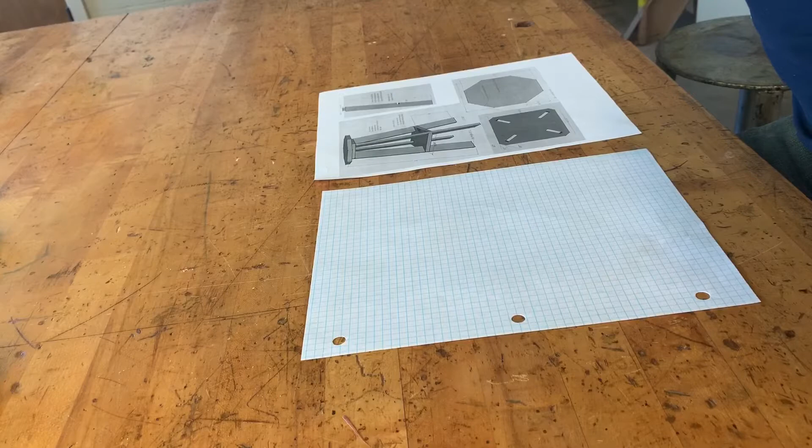So now what we're going to create is a little cut list off of that board that we just looked at. What I'm looking for on this paper is basically the overall perimeter that thing's going to take up. I'm not worried about the angles, I'm not worried about all the little detail stuff. I'm just trying to get a general idea of where all these pieces are going to come from.

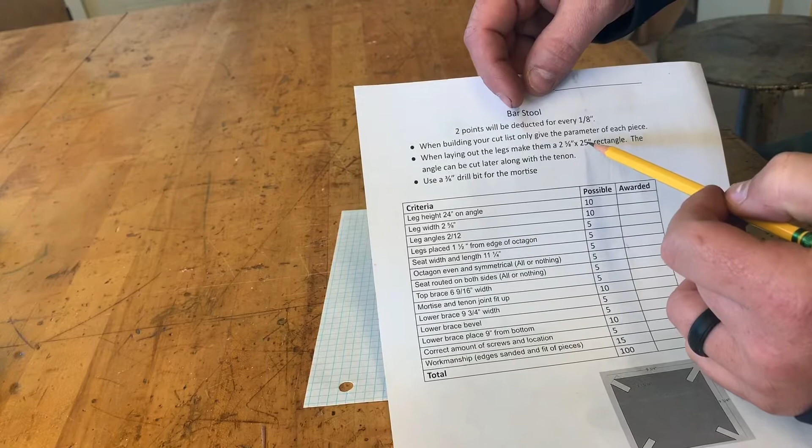One of the things that we're really going to look for is that on the legs, it tells us here that we want to cut them 2 5/8 and then 25 inches. So kind of a little key that we have in with these things. So we're just going to lay out and do a little cut list of everything. Every box on this thing is going to represent 1 inch. I can't do the full length. I would need 60 boxes, and I only have, I think, 52 on here. So we're going to make every box represent 2 inches.

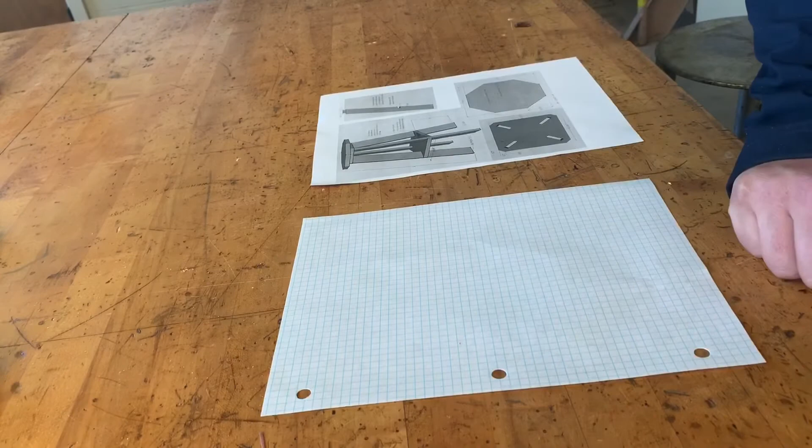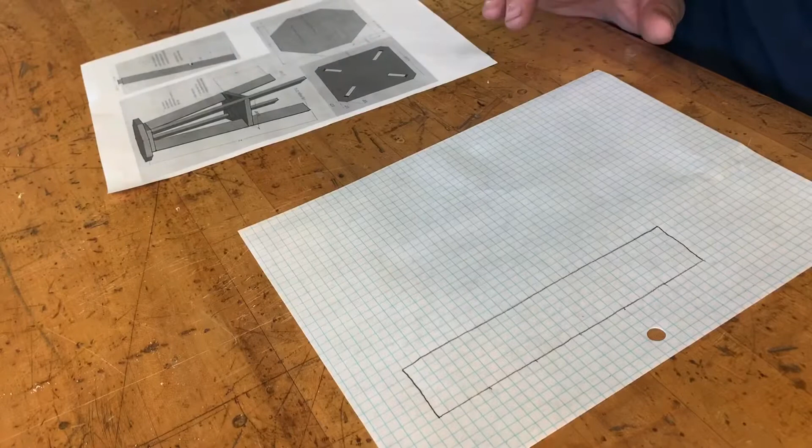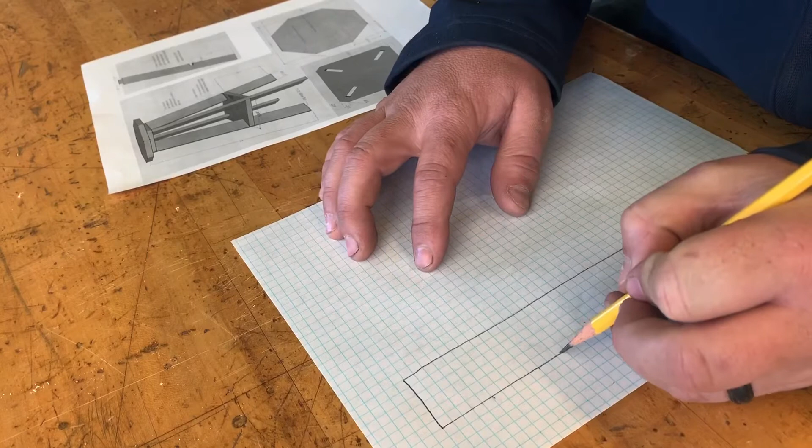When laying these out, you should always take your biggest pieces first. In this case, it's going to be our legs. They are going to be 25 inches long, which means on these, we're going to have to go down 12.5 boxes. Once you get the 12.5, you have to get the width of it. On this, it's going to be about 1.5 boxes for each leg.

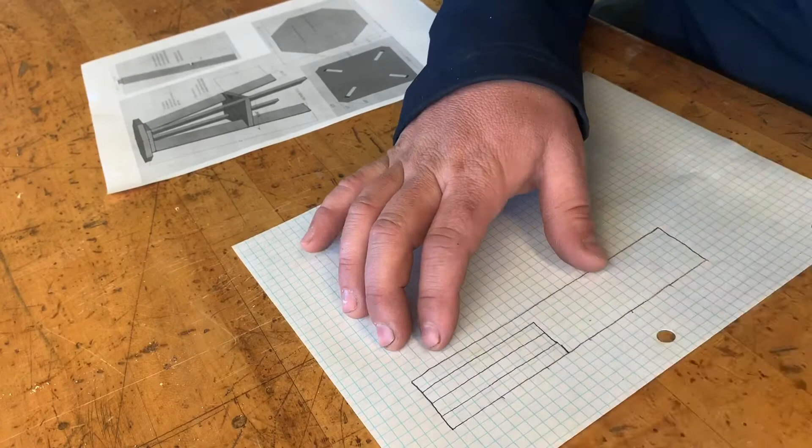Do that. We're going to see how many legs we can get out. If I'm 2.5 here, I need to go right here. We can get another set. All 4 legs out of here. Leg 2, leg 3, leg 4.

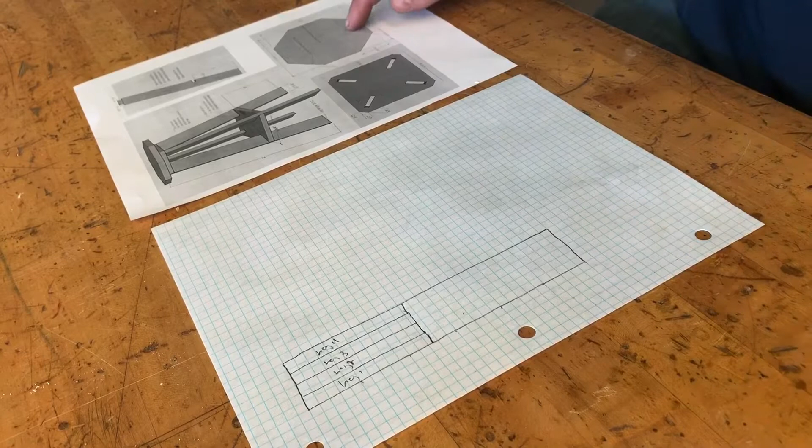Probably the next biggest piece that we have is going to be this top piece. That's going to be 11.25. For all intents and purposes, we're just going to say that it's 12 inches. So we'll calculate these things. It's going to be a 12 by 12, always rounding up. We're going to go 2, 4, 6, 8, 10, 12. So we're just going to draw this line across. That's going to be our little top piece right there.

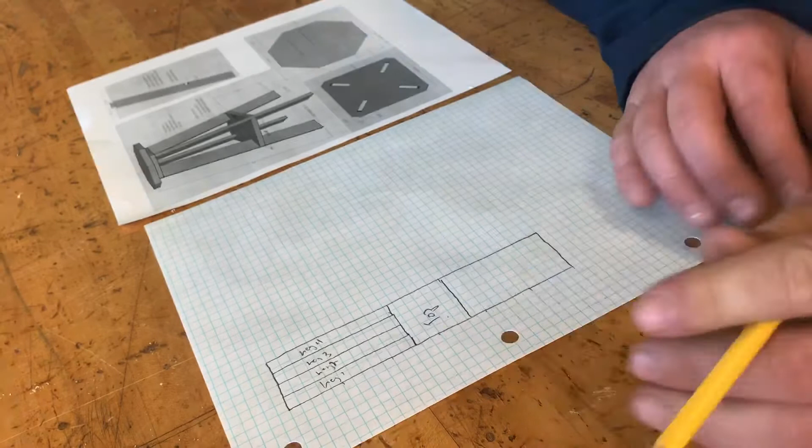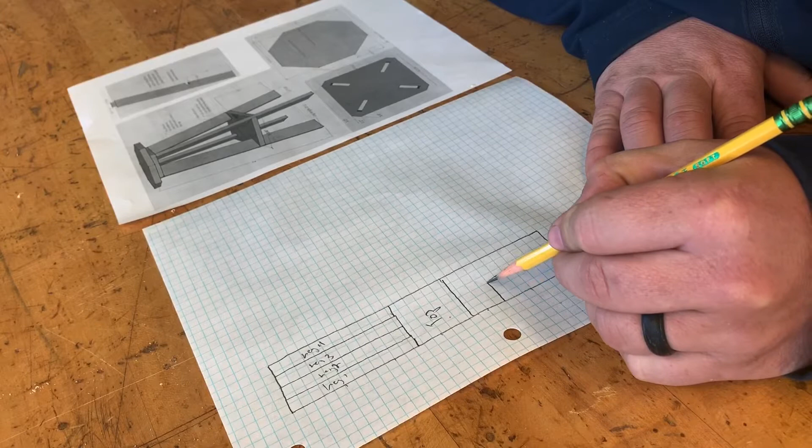So now I've got my legs, I've got my top piece. I have this little brace which goes underneath that top piece there. And that is 6 9/16. It's almost 7 inches. So we'll go a half a box and then 1, 2, 3. 1, 2, 3, and then we'll go a half a box, we'll say it's 7. And that's going to be the brace. That's the top brace right there.

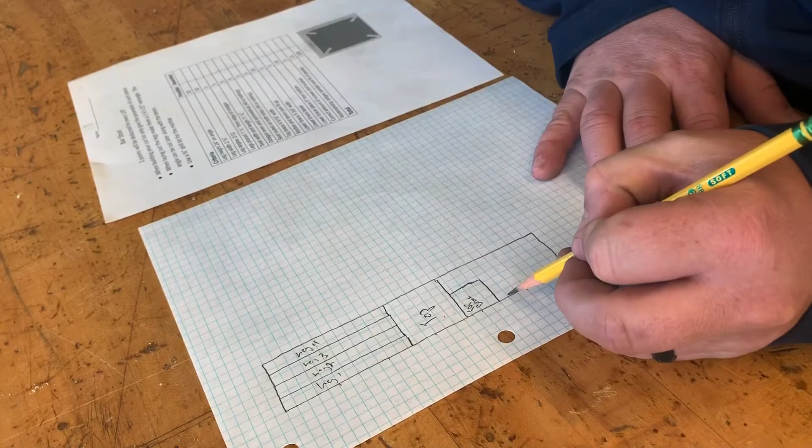Okay, we've got our 4 legs, we've got our top brace, we've got our top. The only thing that's left is that piece. And that's this one. This is 9 3/4. We might say it's 10 inches. 2, 4, 6, 8, 10. 2, 4, 6, 8, 10. And we're going to say this is the bottom brace.

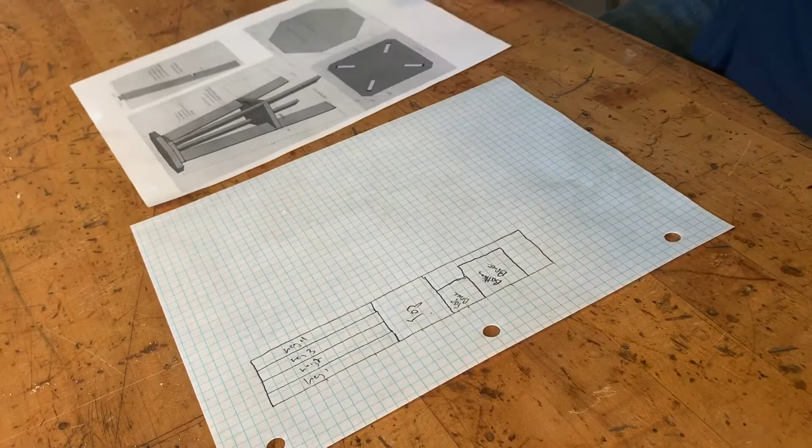So you can see here that we've got all of our pieces. We should have 1, 2, 3, 4, 5, 6, 7. That's 7 pieces. That's how much is going to be in this bar stool. We now have everything laid out, and we have some extra material. We can kind of move those around if we run into knots or anything like that on our board.

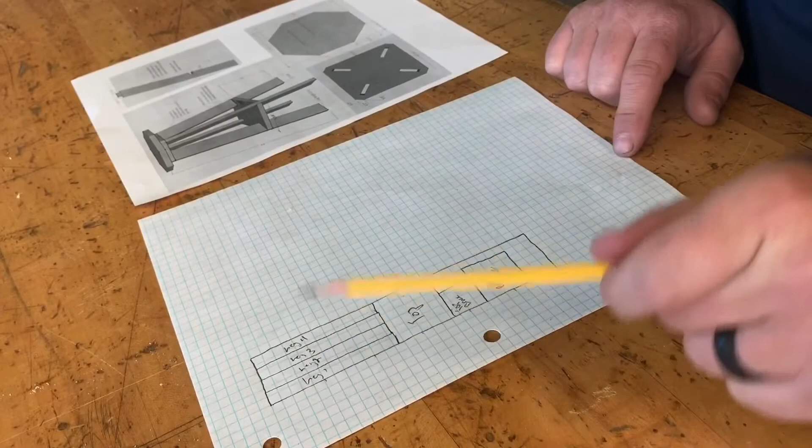One thing I'm not going to do is lay out everything here on that board. I'm going to look at these things so I can make cuts that go straight across. So the first thing I'm going to start with is making the cut across here, and then I can rip those legs down, and then I can work my way through. I always make sure that I cut my larger pieces first, because if I make a mistake here, I can turn that into some of these other pieces there.

We want to make sure we're working with a square end. What we're going to do is trim off just a small little corner there to make sure that we have a nice square end on this board. Now we're going to mark the 25 inches for the legs. We're going to grab a square to make sure we have a nice straight line, and then make our cut.

When I make the cut, you'll notice I score the top, and then I push the blade all the way down to complete the cut. That makes a nice clean cut and eliminates any tear out that can be on that board. We're going to adjust our table saw to the 2 5/8 that we need, and we'll go ahead and lock that blade down.

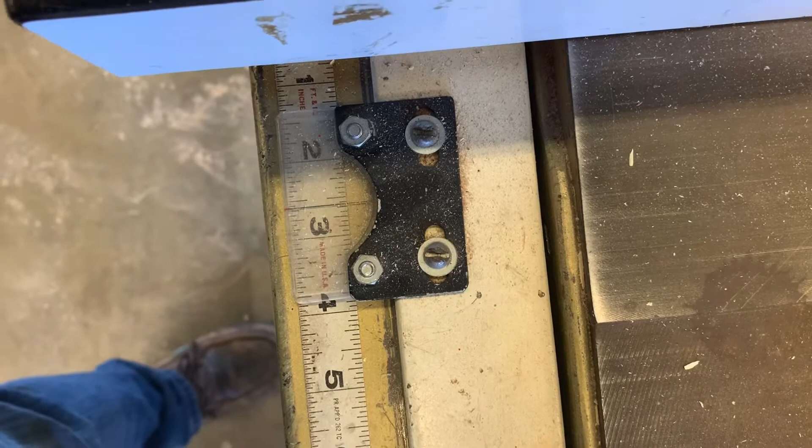As we're making our cut, we're using our hands to push the board in initially, and then grabbing that push stick to push it through the rest of the way. We can continue this by pulling the board out, replacing that board back up against the fence, and then pushing all of our pieces through. Once we get down to the last cut, I want to make sure it's pushed up against that fence, but I don't want my fingers in the way, so I remove my hand.

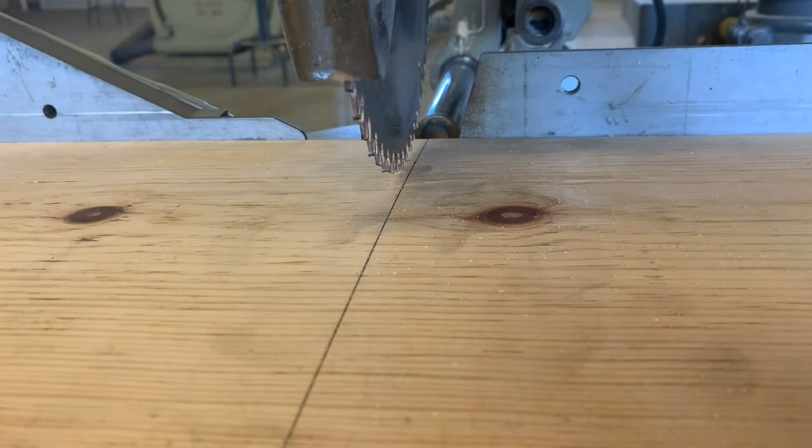When you're lining up the blade on a miter saw, you want to make sure the blade is on the waste side. In this case, it's the left-hand side, making sure that that line is right on the edge of the blade. That makes sure that our cut is accurate. Once we have the piece cut, we can stick it through the table saw, measuring the length. We can cut and trim all the sides to make sure we have a nice and square piece.

So there's one thing I want to kind of make note of. Do you see the way this grain is kind of going around? If you can imagine this as being part of the tree, the center of the tree is going to be somewhere kind of right in here. This board is bowing out. On this side, that's where that bark would be.

Wood is always going to bend and kind of cup a little bit, always towards the outside where that bark was. So if this was like a deck material, you're going to have some of this cupping. The important thing would be to make sure that this is on the top, so that way it doesn't create a cup that's going to hold water. It would basically shed that water off.

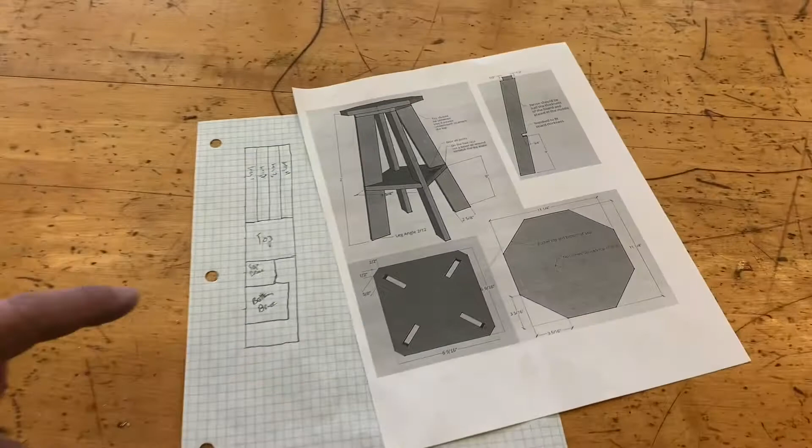So now we've got all of our pieces here that we had laid out on our little paper there. And now we're going to start doing these fine details. Probably going to focus in on the legs first. The next thing that we're going to work on is the leg angles that we have here.

Now, on our paper, it tells us that our leg angles should be 2/12. What that has to do with is basically rise over run. We can do that with a couple different tools, one of them being a framing square. And essentially, when we're dealing with 2/12s, it's rise over run. So we're saying for every 12 inches we go across, we're going to come up 2 inches.

Now it's important to note on these framing squares that when we take our readings, we're taking that same line, so either this line or that line, and that we're reading the numbers on both the inside or we're reading the numbers on both the outside. Because of where that 0 point is on this framing square, that could change things. So I prefer to use the inside.

Now on here, you're gonna see what we're gonna do. We're looking for 3 kind of points. We're looking for the 2 to be on that line. We're looking for the 12 to be on our line. And then we're looking for this to just be right on that outside corner there. Now, it doesn't matter which side I mark, these lines are parallel to each other, so no matter where I read the numbers, I can mark either side there.

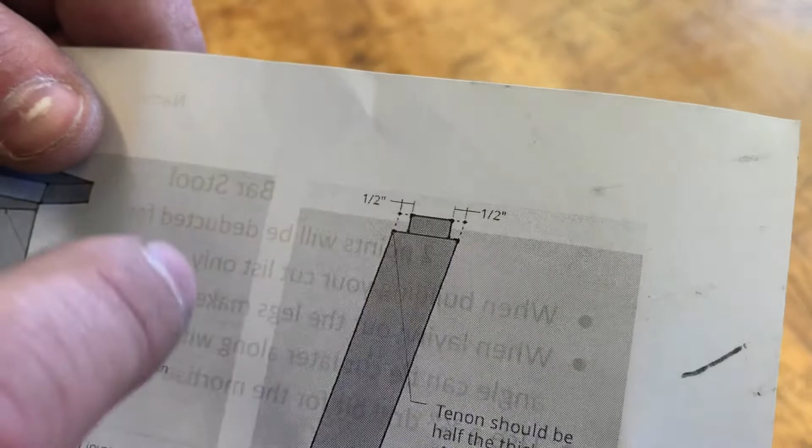So on here, you'll notice that we're gonna go a ½ an inch in on either side. The depth it doesn't give us, but we know that this thing is gonna have to fit up underneath that piece right there. So we know that that board being a 1x12, then it's actually 3/4 of an inch. So we're gonna go 3/4 of an inch down and then ½ an inch over.

We could set up this combination square to get that. We'll set our ½ an inch first. Go ahead and lay these out. We can readjust for our 3/4. Lock it back down, and now we'll go across here. Now that stuff's all there.

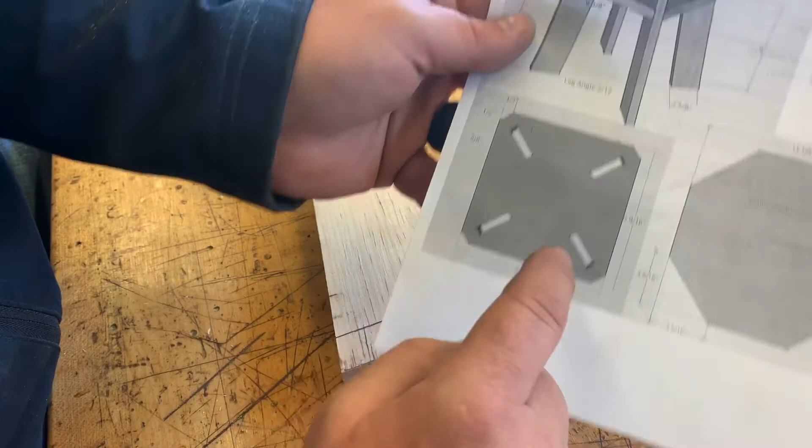The other thing we got to do is we want a 3/8 inch opening on this side. To be able to fit this, we are creating the tenon, and this is going to be the mortise on this other piece here, and that needs to be 3/8 of an inch in width. So what we're going to do is we're going to go 3/16 on either side. Because it's a 3/4 inch board, we got to take away 3/8 in total.

So I'll set our gauge up to 3/16. Now we've got all that stuff marked out, we'll cut on a bandsaw.